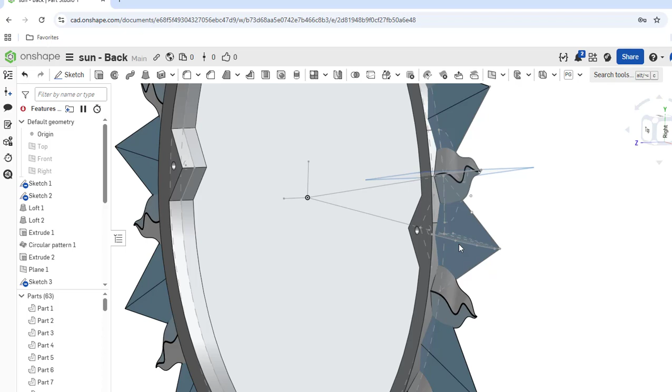Just finished up a project for a friend of mine. He asked me to make about a 24-inch frame inside diameter for a painting he was making, and shaped like the sun. He kind of gave me an example from an online 3D object for the frame, and it wouldn't have worked out as ordered, so I designed my own. You can see here how I did that.

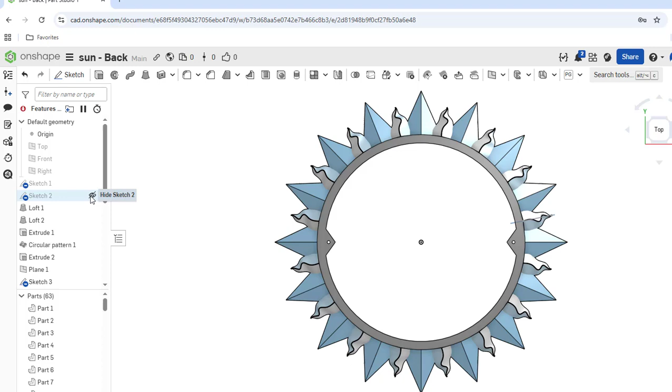I used Onshape as software, online 3D design software. It's free. I highly recommend it. And essentially, I just drew some diagonal parts and some wavy parts, and then I copied them and rotated them, and I figured out how many would fill a circle and look proportional.

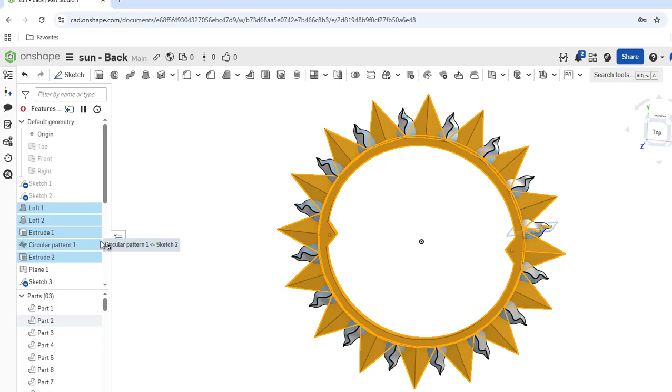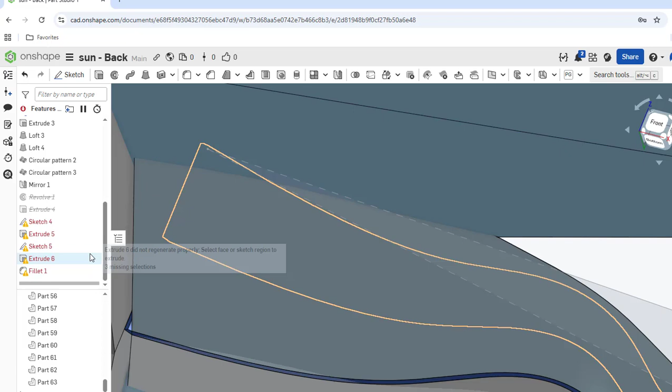And then I got the thickness down, and in doing so I tried some new stuff. I learned to loft between lines, and that's how I got some of those angled sides on each of those, and those interlap, and then I mirrored it.

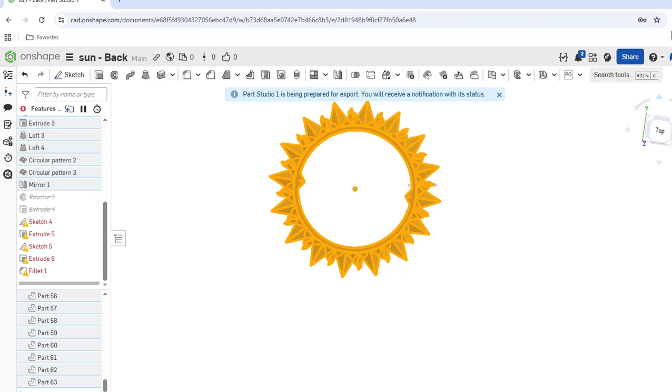I had originally planned on making it both sides would be machined, so it would taper from both the inside and the outside. And it ended up getting a little bit chippy, is the word I would use. So I did not. I basically just made it one-sided, and the back was flat.

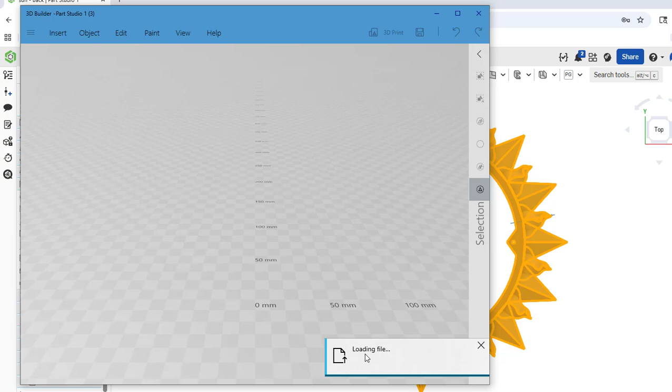Here, what I'm doing, I'm exporting this 3D object into an STL. You could 3D print an STL, but I imported it into my CAD/CAM software that I use on my 3D router, and this is just the raw file, so that shows you what it exports.

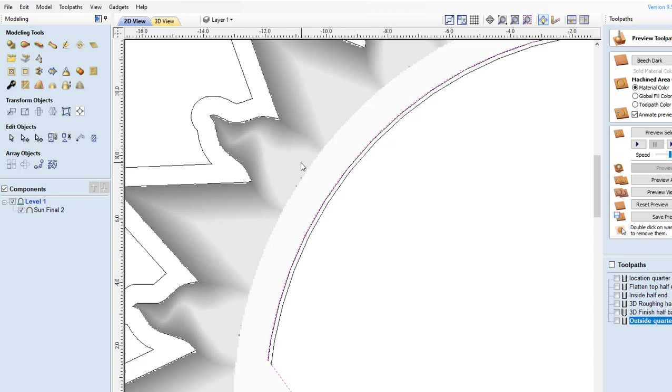And then I go to my 3D software that I use for my router, and I import that 3D image in there, and then there's some tools in there that I use to trace it to get an outside line. You can barely see it right there, and then other lines I generate myself. I draw these little indexing holes. That's how I locate it on the table.

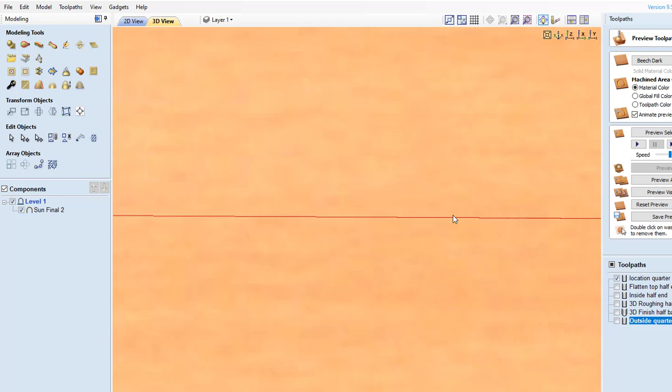I originally planned on flipping this part and doing the back side, so you want to have index holes so it's in a known location when you turn it over. Ended up not using that, but it was a nice way to keep it firmly affixed to the table so it wasn't moving around in the clamps, that type of stuff.

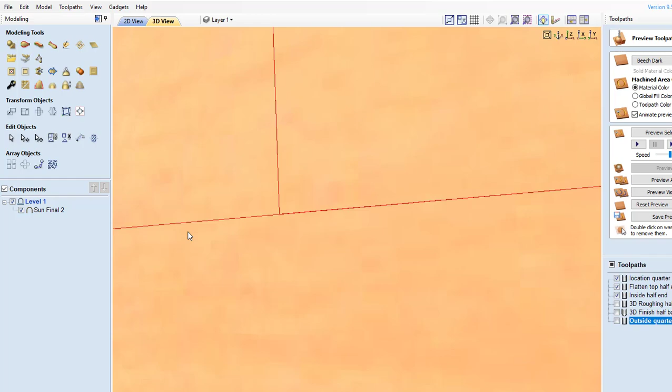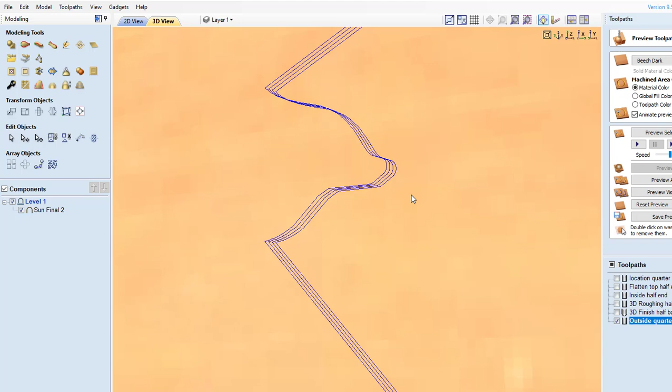I also did a flattening. The circular pattern there on the top is for flattening the face of the thing, and then you can see where I rough out and there's two moves, basically a roughing pass that will kind of just get a lot of the meat out of there. You do that with an end mill, and then the final pass I did with a half-inch round over, and this is kind of the simulation of it.

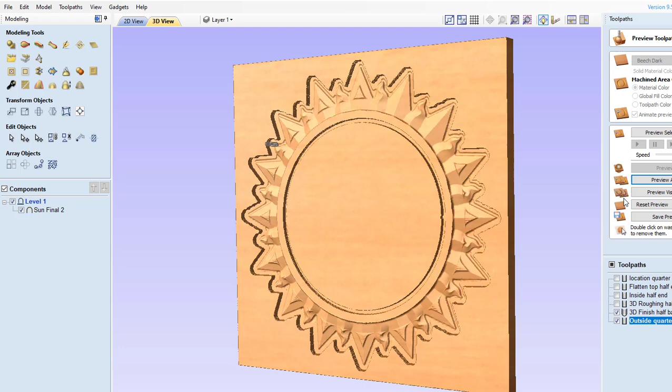This is the roughing portion, and it comes out. You can actually see it's pretty rough, and there'll be some pictures. Now it's going into the smoothing cycle. I ended up doing that smoothing a couple times. I was unsure how much material it was going to take out, and I tried it with a 1/4 inch bit. That did not work out well, so I switched to the half-inch and just did half.

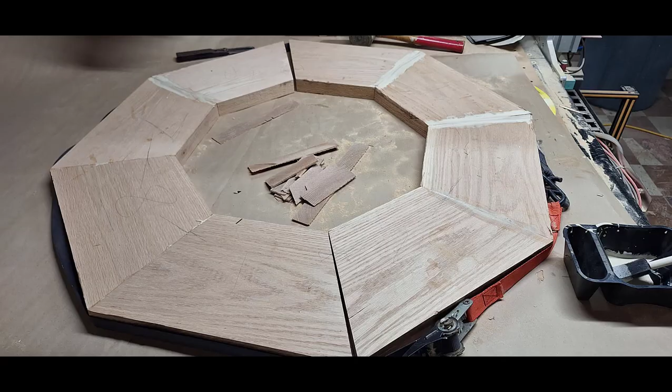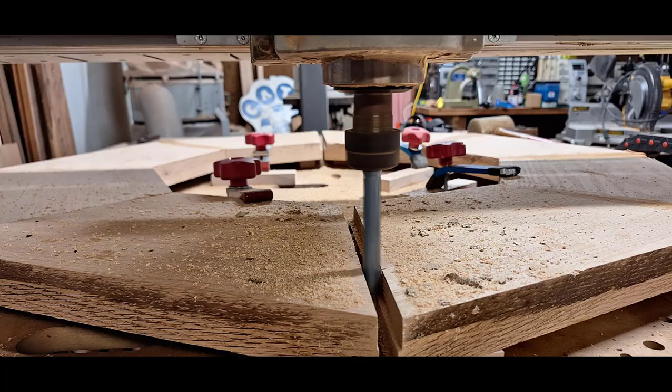These are some of the pictures from when I built the stock. It's about 1 5/8 material oak, and cut it in 8 sections using the radial arm saw. And what I found is it's really tough to get that angle set perfectly.

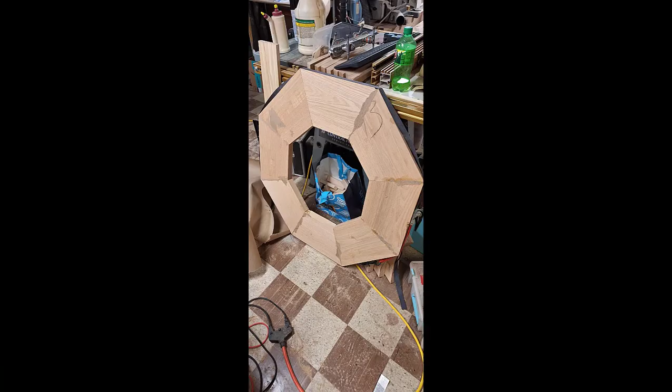So what I did is I got 2 halves glued up, and then I put it on there and machined both sides at the same time, and that way they're perfectly flat to join them together. And that worked out really well. I learned that from another guy online.

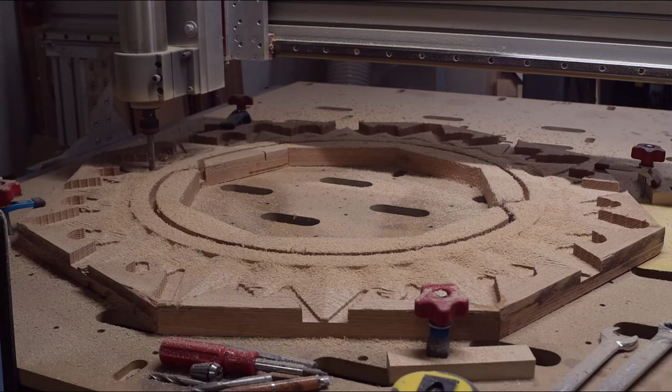I got quite a bit of video of doing this because I did it a few times. I didn't want to take off too much material at once and move the part or bust a bit. I used a 1/2-inch bit just to kind of smooth it out with that larger radius, with the round over bit 1/2 inch in diameter.

It makes it fairly smooth, and so you can have quite a bit of, not a little overlap is the way I should term that. So each pass is not too close to the last one. It would take forever if I really set it down to get it perfectly smooth. But with the big bit, it makes up for it.

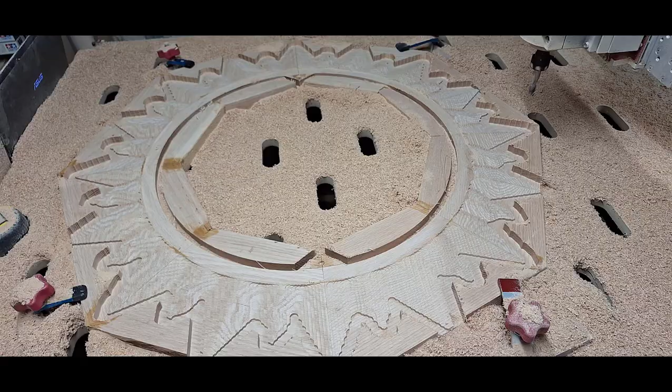I was tempted after I did the roughing, and I set the overlap at a pretty wide space the first time I did it, and it was pretty pleasing looking with that wide overlap with the round over bit. So I asked the end user, the customer, if he would like it rough like that, and it didn't sound like he was too enthused about it. So I went ahead and smoothed it out.

These are the roughing images, what it looked like with the end mill, and then the next pass was a kind of wide overlap, smooth finish. But these are all the rough end mill cut. So this is kind of how you hog out the material. You could start to see what it looked like. I was worried I hadn't cut it deep enough.

And then this is that rough finish with the wide overlap, and I thought that looked pretty cool. But it would have been heck to sand out. So I wasn't sure what finish he was going to put on it, if he wanted that serration look to it. But I ended up making it smoother.

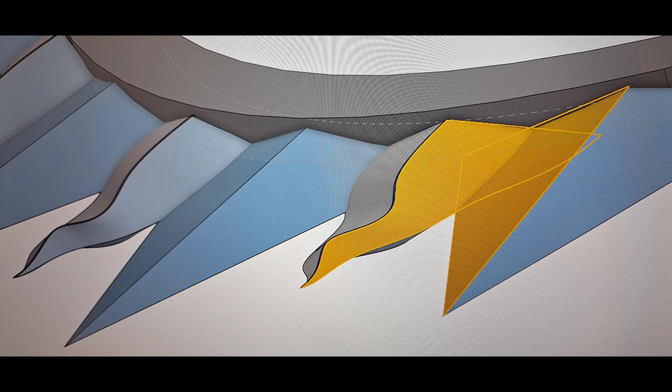And this is the smooth final. It's kind of tough to see a lot of that detail, the splines and lofted edges and things like that. But once you get it in the light, you can finally see it here.

So the artist here is Matt Bishop. He had originally done this painting on a motorcycle tank years ago and always wanted to give it another go. And this was a fantastic image. He just knocked it out of the park. I believe he is going to have this frame in black and then gold gild the inner ring of it, kind of a black hole sun image.